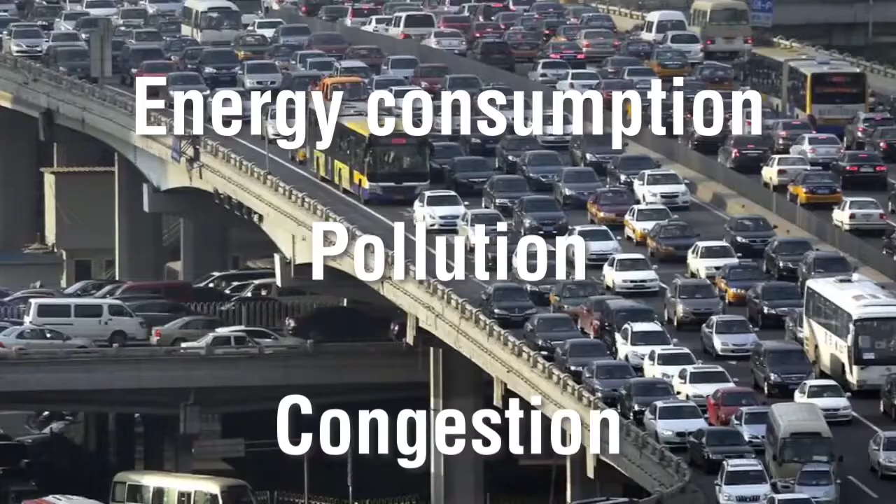Today, half of humanity, around 3.5 billion people, live in cities. Although urbanization generates important benefits for people, such as the creation of employment opportunities, cultural spaces, quality educational facilities, and health infrastructure, as well as an overall improved standard of living, urbanization is also rapidly leading energy consumption, pollution, and congestion to alarming levels.

Much of the urban population of the world currently depend on a car or other motorized vehicles for their mobility, which accounts for an appalling 1 billion cars worldwide. This not only makes cities important sources of air pollution, but are also the places where annually more than 500,000 road traffic fatalities take place.

The problem is that all of these numbers are only increasing. It is forecasted that by 2050, more than 6 billion people, about 70% of the global population, will live in urban areas. Therefore, an international push towards sustainability is crucial not only to lessen the strain on social, economic, and environmental well-being, but also to fast-track national and global development.

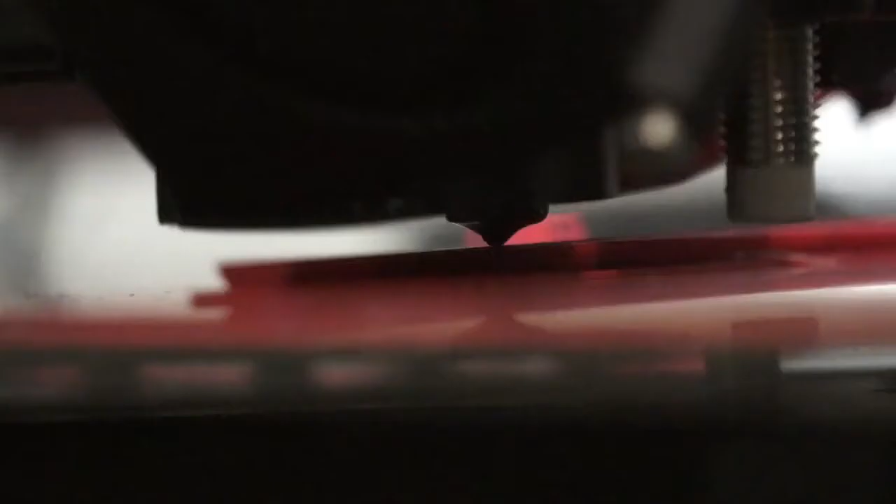In the 2012 United Nations World Conference, global leaders unanimously recognized that transport and mobility are central to achieving the sustainability targets of the world. However, notwithstanding that this generation has witnessed the haste in which technological changes have occurred, in terms of mobility, we are still chained to the past through the paradigms that the car industry has established for the past 100 years.

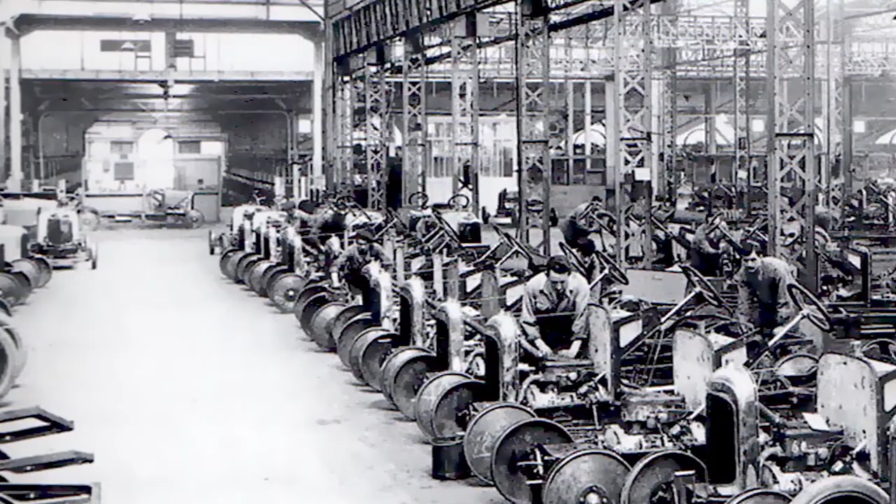For decades, we have been focused on the incredible benefits of using solar energy to sustain humanity's future. So using solar energy has been the core principle of our academic programs, which have been welcomed with strong interest and commitments by our students.

In 2012, the first Spartan Superway work team came to life with the collaboration of many enthusiastic students and professors. And now universities around the world are starting to embrace the solar alternative we are developing to replace our current fossil fuel dependent transportation paradigm.

In this video, we will explain the overall process we have followed to find new answers for mobility challenges around the world.

The first step that our teams have followed to face the immense task of developing a new transportation paradigm was to perform a thorough intellection phase to unravel the intricate mesh of factors that conform an urban transportation system. Any innovation project of this magnitude requires a deep understanding and intellection phase that must provide key information and insights to guide the decision-making through the project.

From the very beginning, we knew that a project as complex as this one would require different teams addressing different problems at the same time. That is why we have recruited students and experts from different professions and from all over the world. It's important to understand that if any university wants to take on a project of this complexity and scope, it's vitally important to develop collaborations with many disciplines, either within or outside the university.

This is the reason why we have divided our team into 4 main subdivisions that within them have divisions of their own, which are engineering, urban planning, architecture, and industrial design.

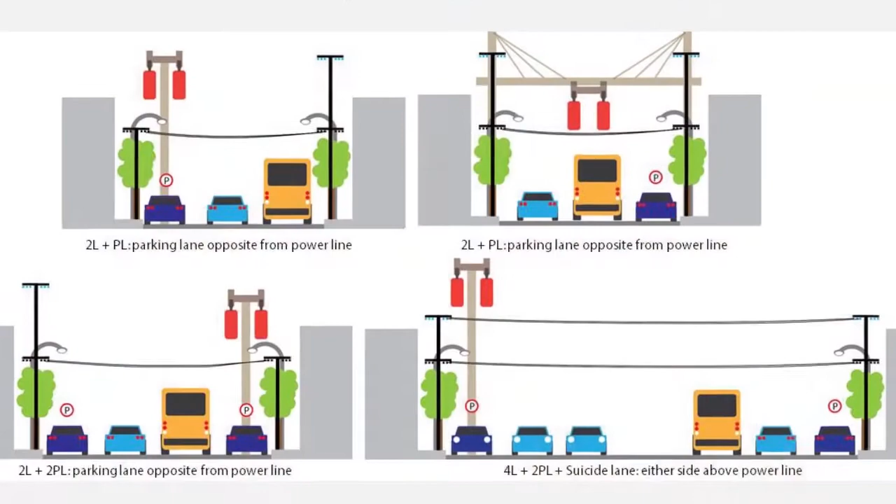We soon realized that for our proposal to be useful for people, it was of the utmost importance that our design became flexible enough so that it could be adapted to any context, urbanized or not.

Therefore, our teams have used information coming from contrasting contexts, from cities with overwhelming traffic problems to places where there is no mobility infrastructure at all. With a clear understanding of these general goals, each team set goals and procedures of their own.

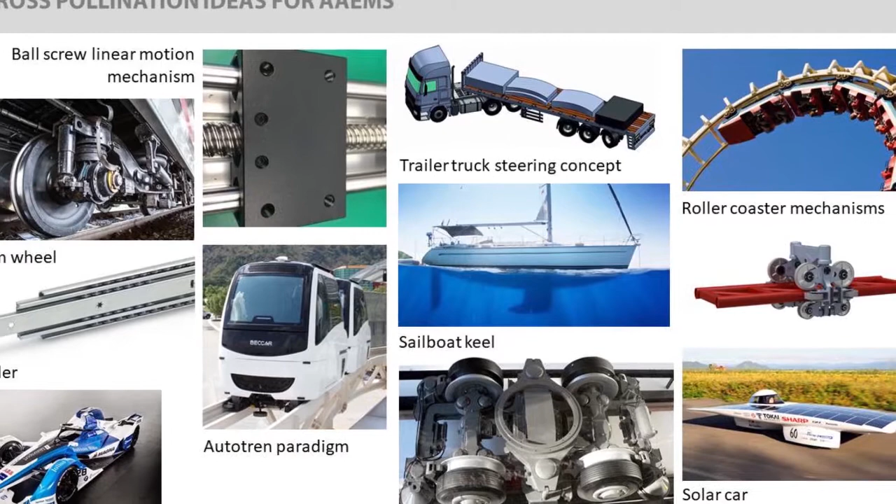But more importantly, because of the knowledge and techniques to solve problems from one field constantly overlap with those of another, the need of dynamic communication and cooperation between the teams had to be encouraged and enabled. The main directives that remained relevant to each and every team were efficiency, cost effectiveness, user safety, and user acceptance.

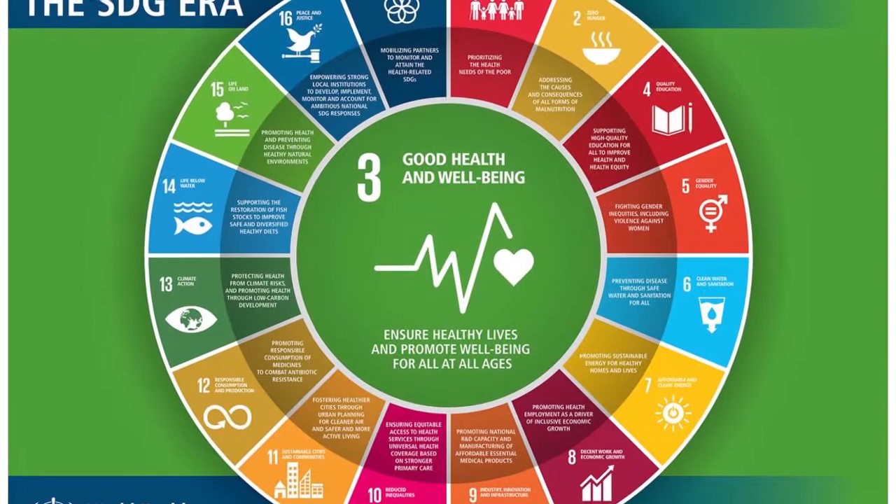Our teams have also studied the sustainability goals of international organizations such as the ones put forward by the United Nations and the World Health Organization. Only a precise balance among all of these factors will provide any project with a solid opportunity of becoming a functioning product in the outside world.

Based upon the analysis of all the data we had obtained, we set out the goal to design a new transportation system, and we called it Spartan, Solar-Powered Automated Rapid Transit Ascendant Network.

Spartan Superway is a transportation system that can be built economically and rapidly, and it's adaptable to both urban and suburban densities. It can be readily expanded, which helps reduce gridlock traffic by moving people and goods on an elevated guideway with photovoltaic solar energy and self-driving zero-emission vehicles.

Since our base of operations has always been located at San Jose State University, which, like any other university in the world, has its own particular mobility problems, we began to study such problems to elaborate an initial hypothesis: if we could connect San Jose State University's different campuses located blocks away from each other without altering the current urban infrastructure, we could begin to demonstrate the flexibility and adaptability attributes of our system.

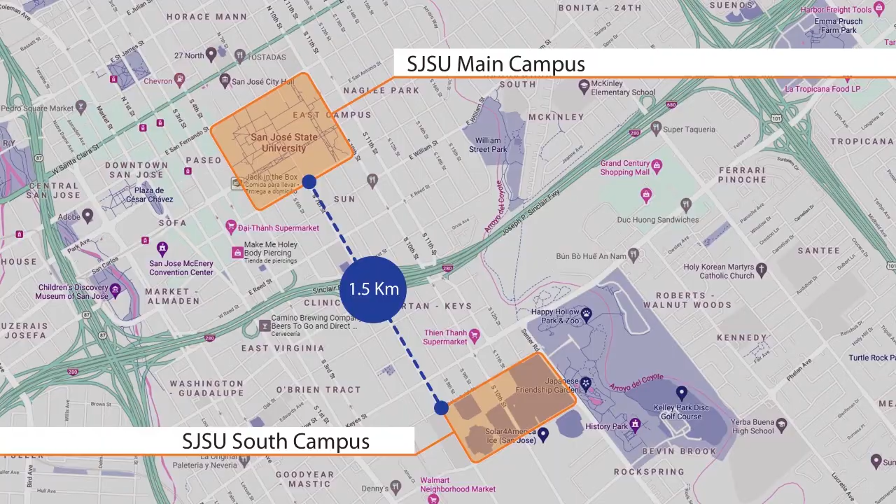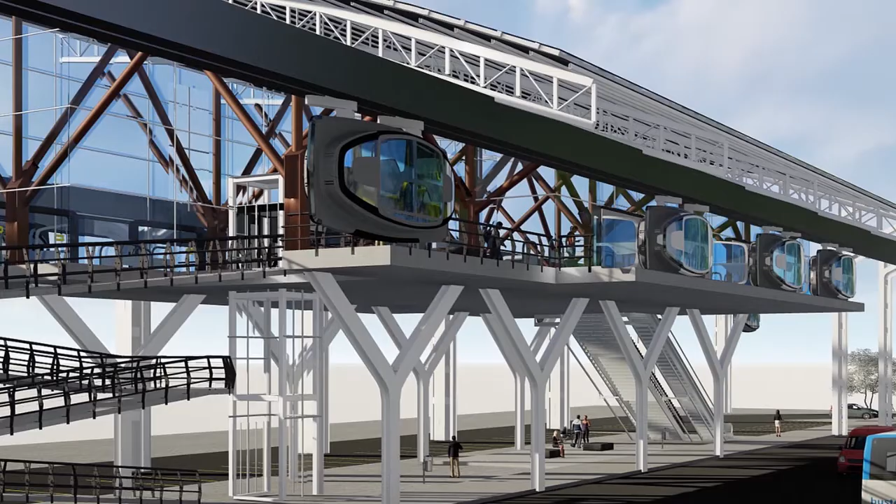It also became clear that San Jose was the ideal testing ground to install our system, as it is located in the very heart of the innovation capital of the world, Silicon Valley. If we succeed, San Jose State University would become the first university in the world to own its own experimental, fully automated photovoltaic transportation system that would not only connect its different campuses, but would also put it at the front of international transportation innovation.

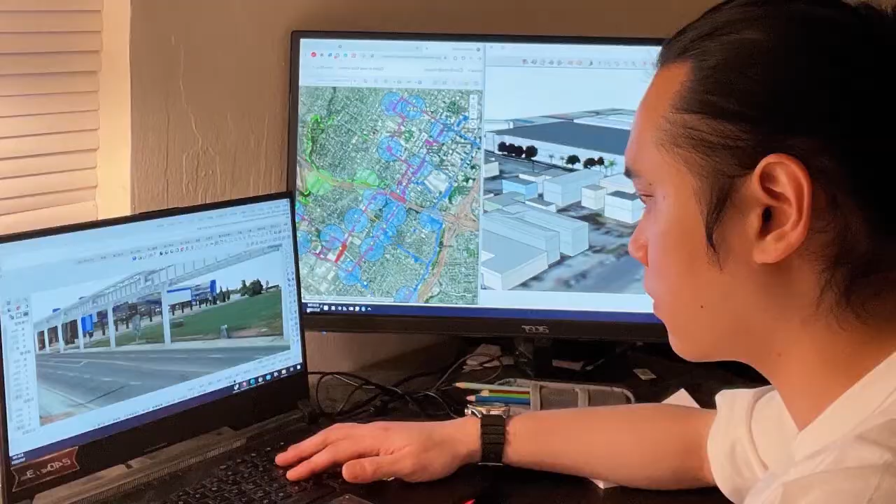Additionally, our team of urban planning did an extensive site reconnaissance to determine the optimal location of the route and its stations so that they could provide a truly useful service to the community. The objective then would be to connect two campuses located several blocks from each other, one being the main campus, and the other the South Campus with its stadium.

One scenario within this context that we found interesting to study further was game days at the stadium, when the amount of people moving from one campus to the other increases considerably, causing congestion, accidents, noise pollution, among other things, which our system could substantially reduce.

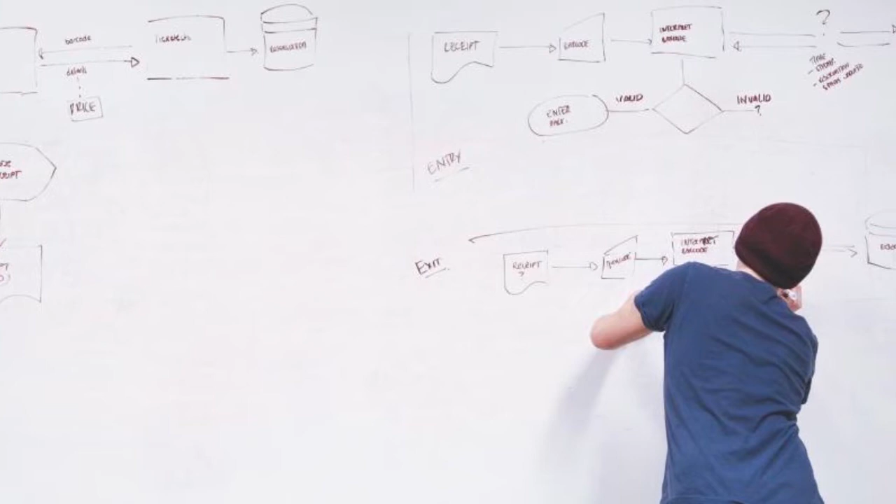While the urban planning and user experience teams were working on defining the context and specific needs that had to be contemplated, the rest of the teams were working on designing the different elements that make up the system.

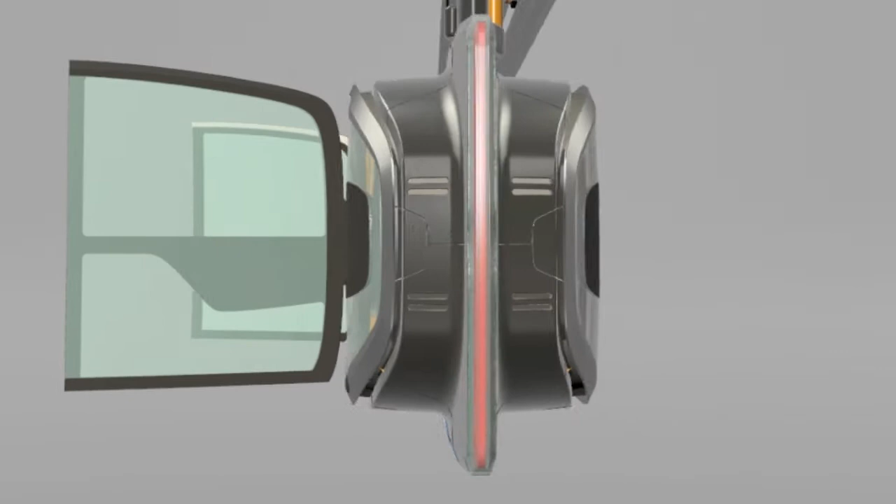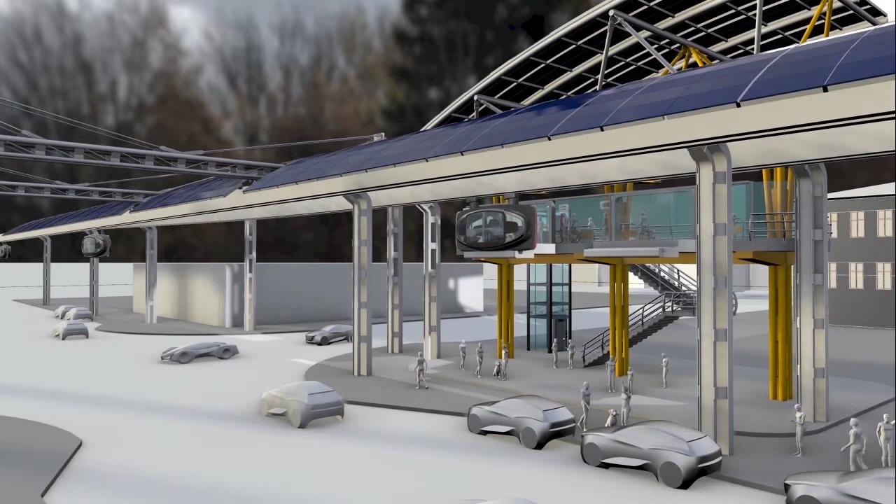The conjoined work between the teams of engineering and industrial design has developed what we call the pod. The pod is a self-driving, fully automated vehicle powered by photovoltaic energy that runs suspended from a bogie that runs on a guideway. This configuration provides a fast, highly efficient, and very safe form of travel.

Our team of engineers has developed a bogie that works under the premise of safety redundancy. If one half of the bogie should malfunction, there is an independent second half that can move the bogie and its passengers to safety. The bogie's design is based on more than 8 years of development by Spartan Superway, with valuable technical contributions from engineering students at San Jose State University, Swenson Solar, the International Institute of Sustainable Transportation, industry mentors, and support from our sponsors.

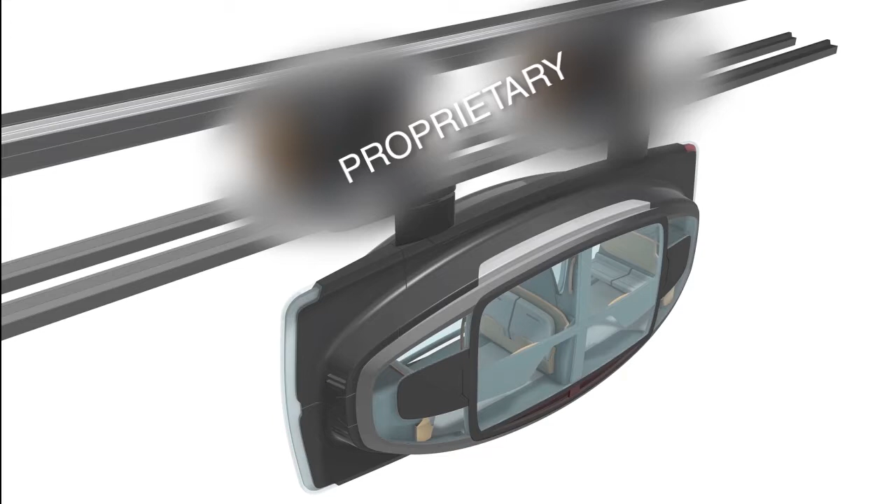One key feature of our design is the specially designed mechanism called the switching arm, a device that allows the pod to change its trajectory. This switching arm is built on the bogie instead of being part of the guideway, as it is normally the case in railway systems. The switching arm mechanism is the key feature that allows the guideways to be simpler in their configuration and construction compared to traditional railways.

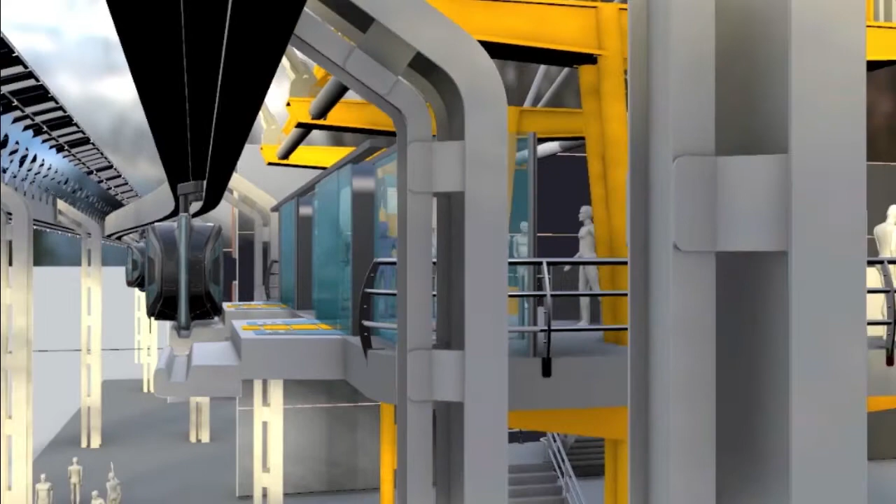This allows the system to become more than a simple closed loop with just a couple of stations. Instead, it will have the possibility of growing into a network very similar to the current grid of streets in cities, with as many stations as necessary.

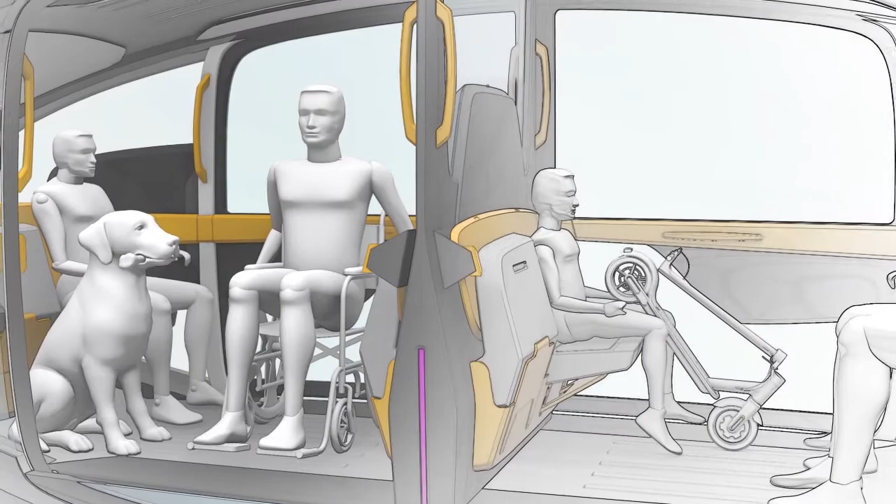We are designing the interior of this pod to be adaptable to different travel circumstances. In terms of passenger transportation, the interior has been thought out to be completely rearrangeable depending on the different user needs we might encounter. Within the pod, users will find a number of possible seating configurations that will allow people with different needs to travel safely and comfortably.

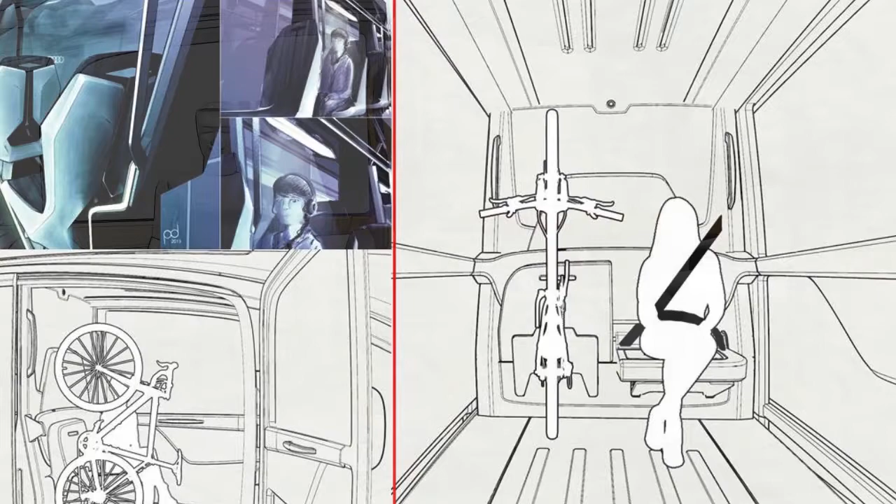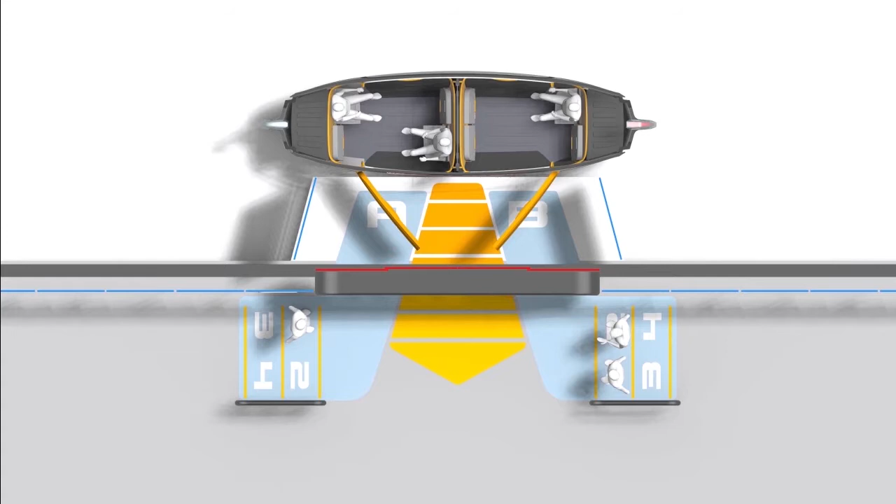It is important to remark on the safety measures devised to maximize safety throughout the ride. For example, the opening of the doors creates a temporary corridor that protects users from gusts of wind and safely conducts them in or out of the vehicle.

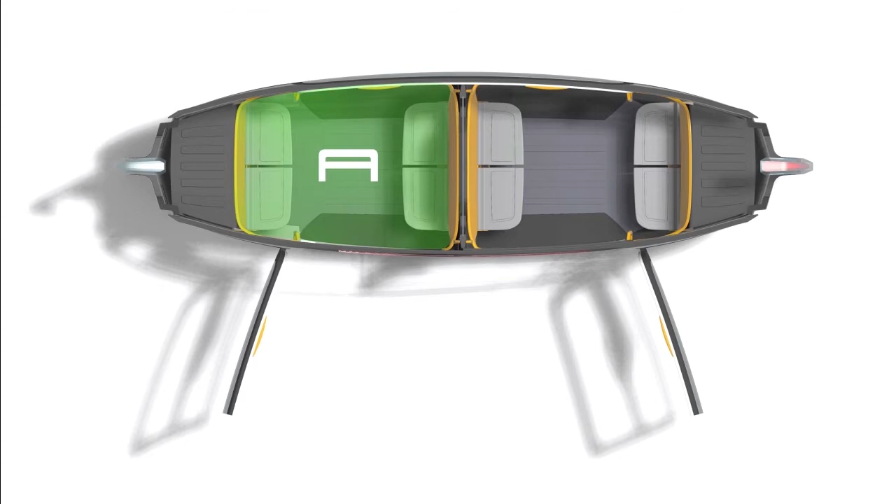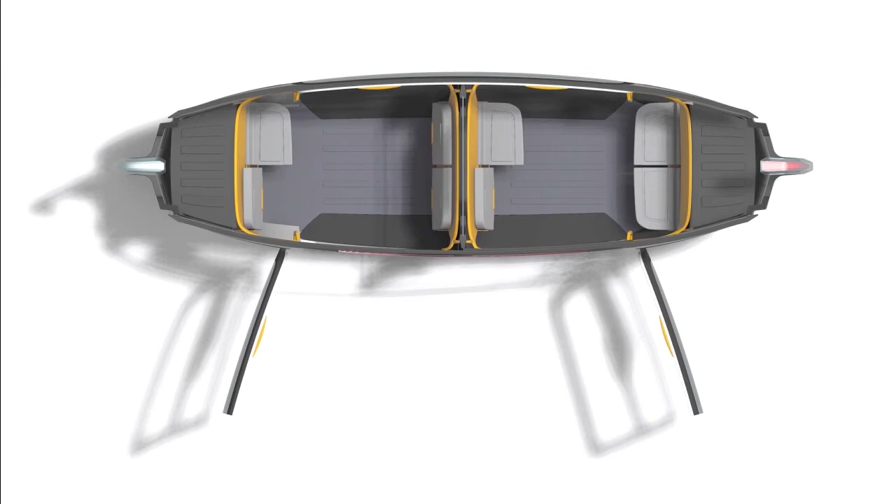One of the lessons that must be learned from the 2020 pandemic is that public transportation must be able to react to such events and provide alternatives where contagion is diminished. That is why the cabin design contemplates dividing the pod into smaller compartments to keep people isolated as much as possible, something that today is almost impossible to do in most public transports.

The Guideway. The Guideway's design is the result of all of our teams working collectively.

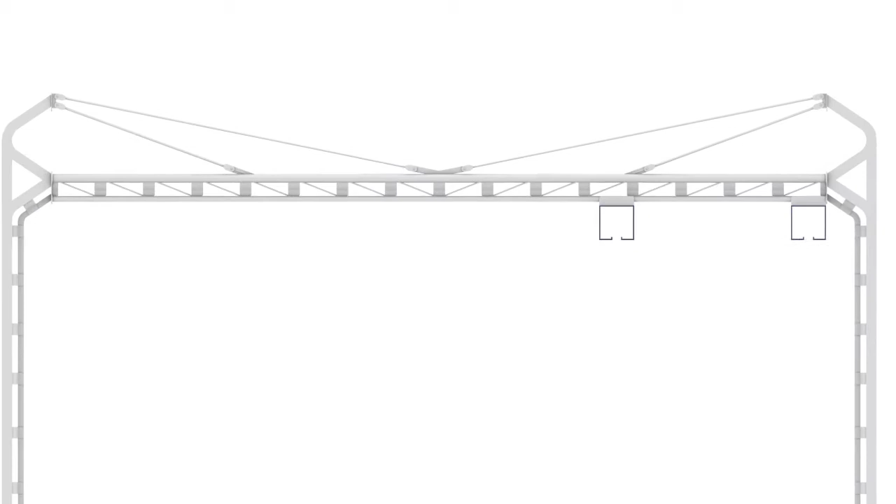The engineering and architecture departments have faced the challenge to make the Guideway and the columns that support it as modular as possible, so that prefabricated parts can be brought from factories to be assembled on site. The flexibility and versatility of our column and Guideway design should allow us to place the system wherever it is necessary without affecting any of the currently installed urban infrastructure.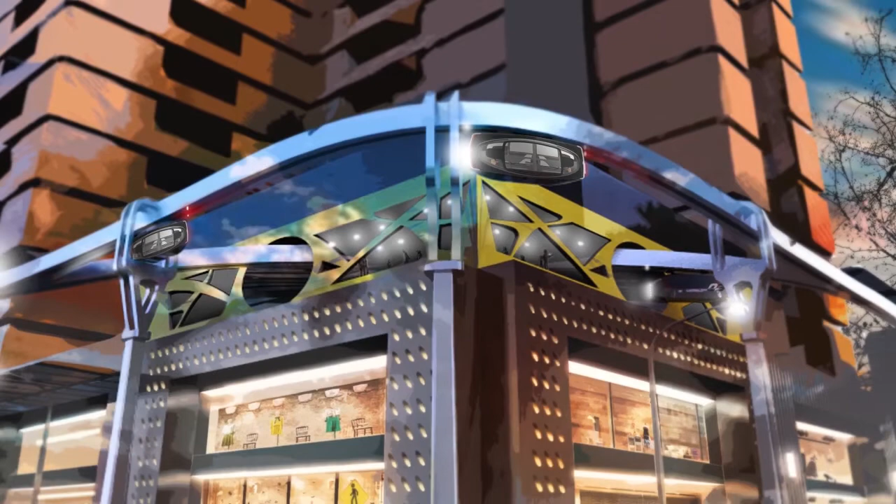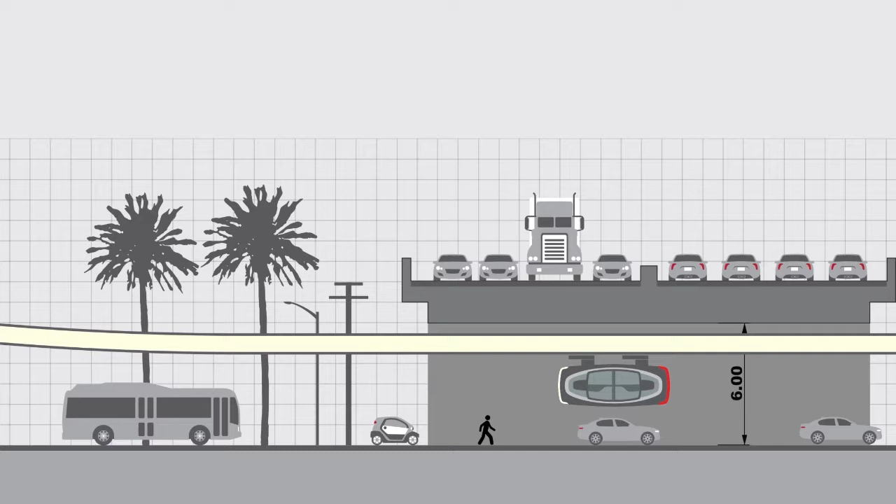One of the main obstacles we had to overcome was finding a way of crossing San Jose's freeway overpasses. After studying different scenarios, the decision was made to go underneath the freeway through the underpasses, as our models and simulations showed that it was possible to do so, thus connecting parts of the city that frequently remain inaccessible to people without a car.

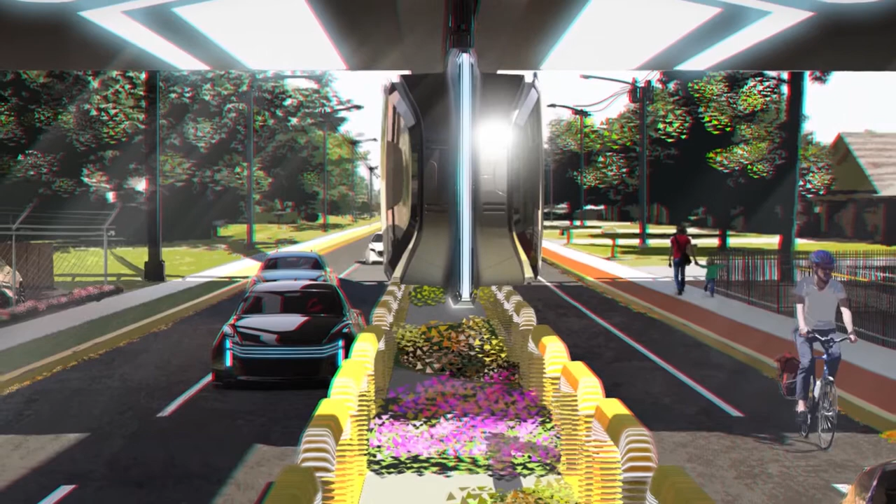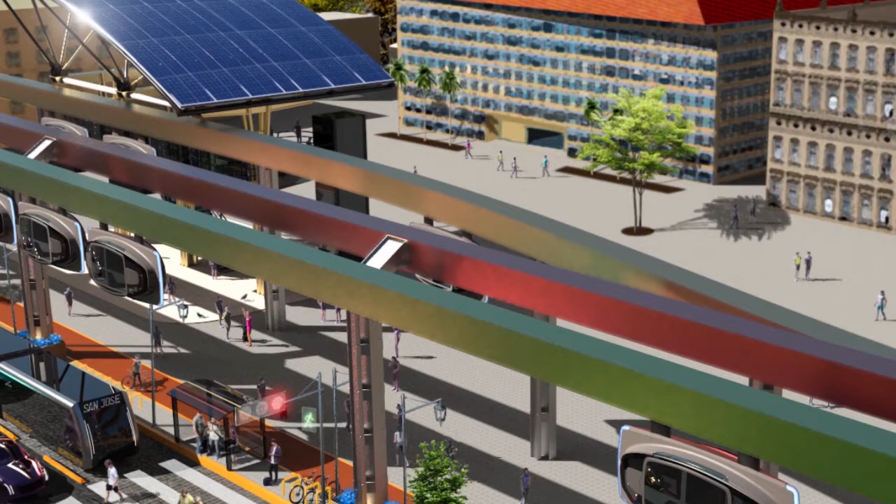The combined function of the switching mechanism on the bogie and the careful placement of forks on the guideways will allow the pods that need to stop at a station to divert from the main guideway without interfering with the rest of the transit.

All of these designs and functional features would make little sense, especially today looking into the future, if they were not powered by a renewable energy source. Therefore, the whole system will be covered with solar panels that will provide power not only to the pod cars, but also to the stations, and will provide electricity to all of the system's requirements.

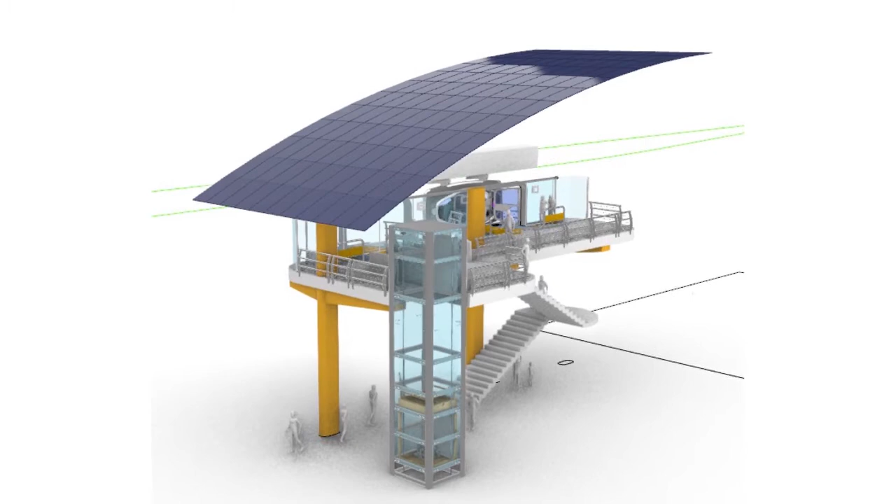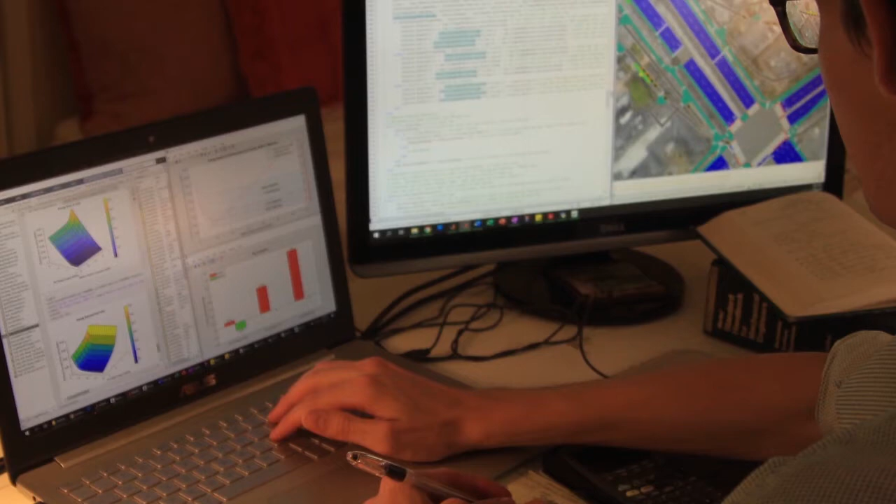The use of photovoltaic energy to power the system has been a crucial aspect of our concept since its very inception. Our team of engineers has conducted a series of simulations under different circumstances to find the energy requirements of the system. They are also trying different configurations to find the optimal arrangement of electrical components to use solar energy's full potential.

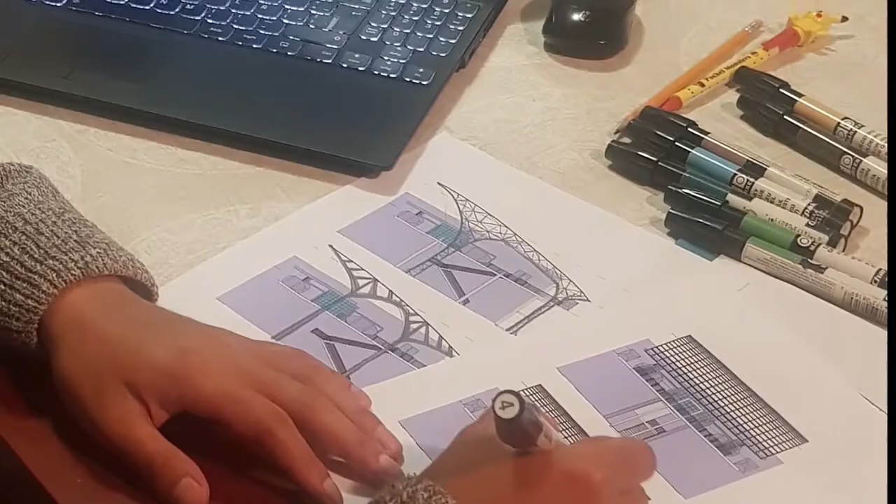Finally, the work of our architecture, urban planning, and industrial design teams came together to design our stations: elevated access platforms that allow riders to board the pods in the most safe and efficient way.

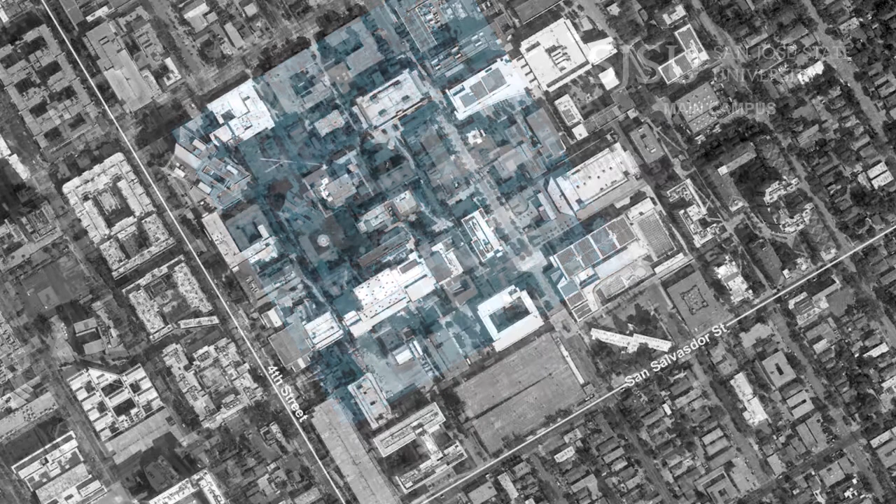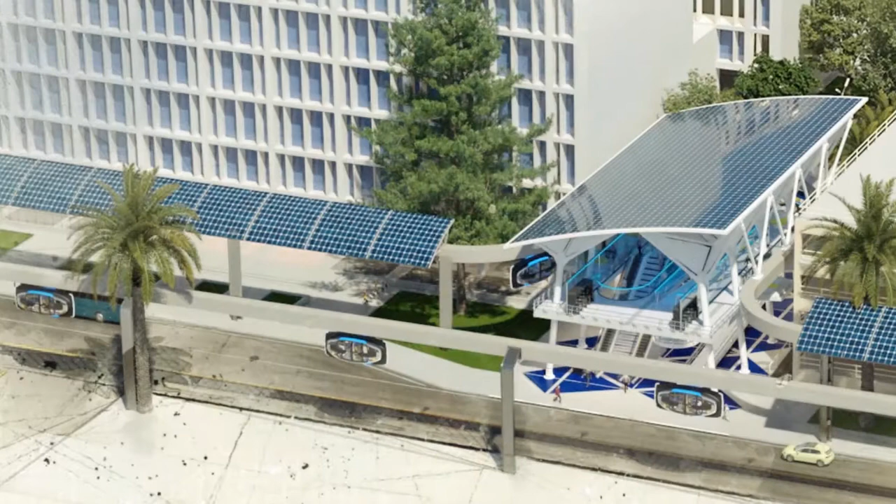The North Station. Our northmost station has been thought out to be located within the main campus of San Jose State University. While scouting the area for open spaces to locate this station, we came across a small plaza or corridor between two buildings that, because of its location and dimensions, became the perfect spot for our purposes.

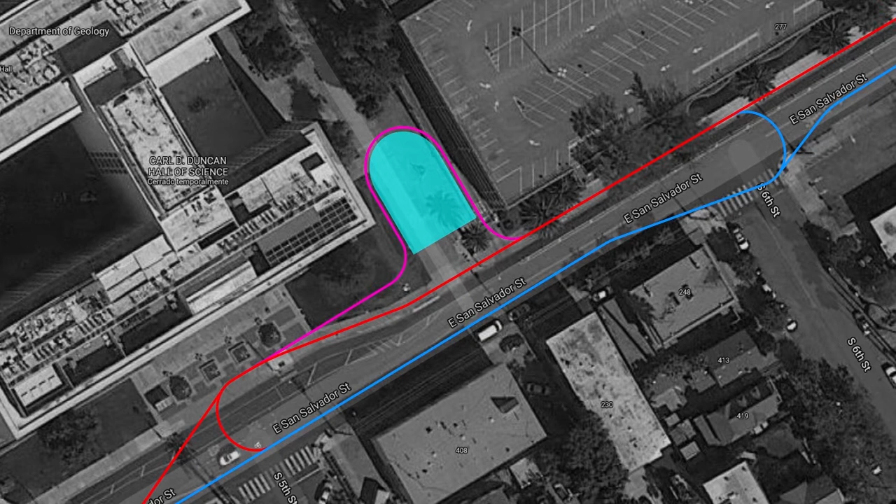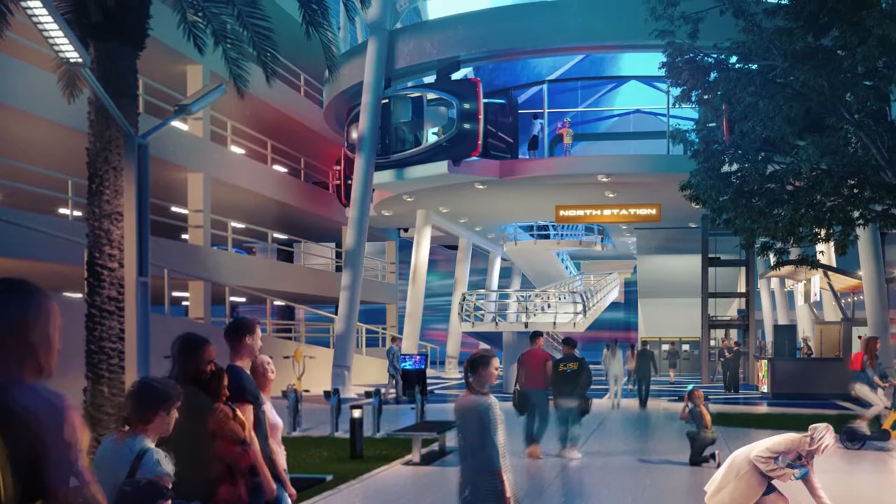This design is a good example of a station that can only exist on one side of the road, on a two-way street. Its location calls for the use of roundabouts to allow the pods to change direction and enter the station. This open space corridor not only serves as a perfect guideway for people to go into the station, but also could become an unofficial entering portal or meeting point for people to later go into the main campus.

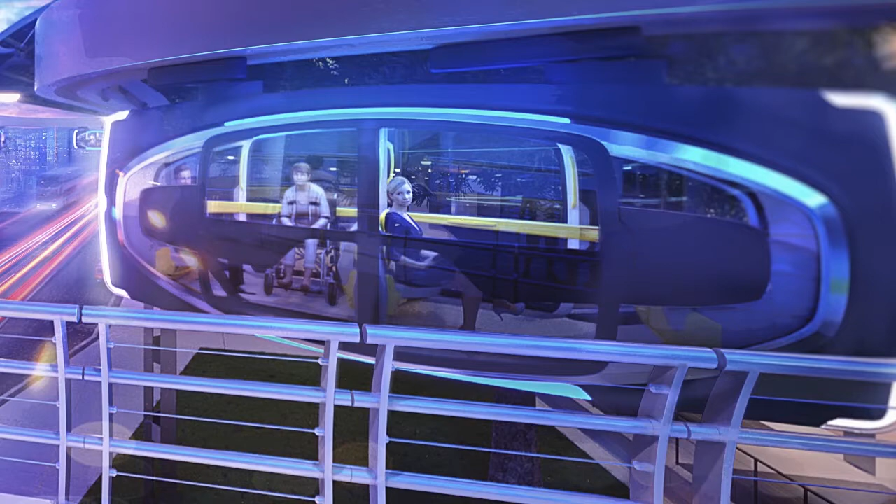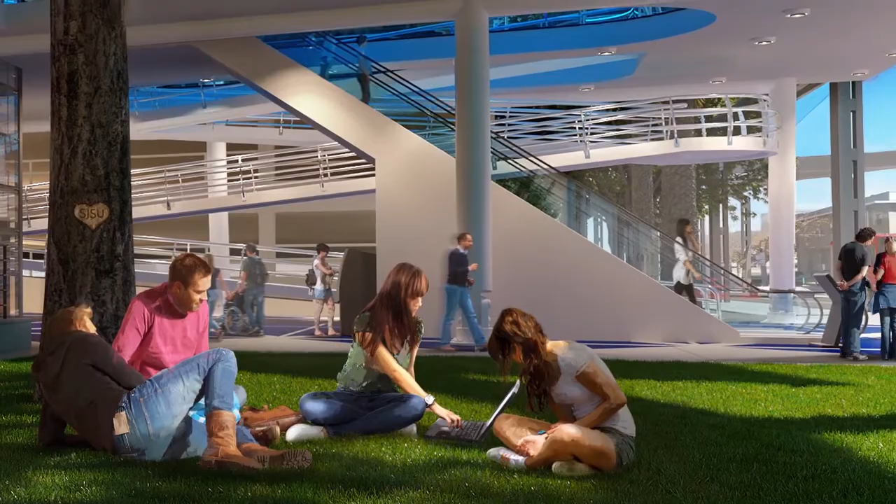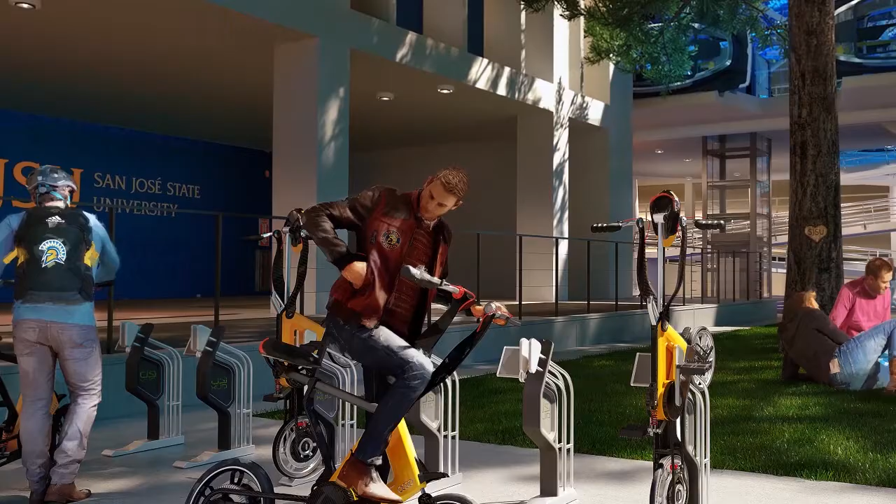Our stations are being designed carefully to become more than mere boarding platforms, as they are being given features and spaces that foster socialization. One purpose of this station's design is to become a place of reunion and social interaction. That is why we are planning all of our stations with different types of services, such as last-mile vehicle stations, to help people move around, whether they are using the system or not.

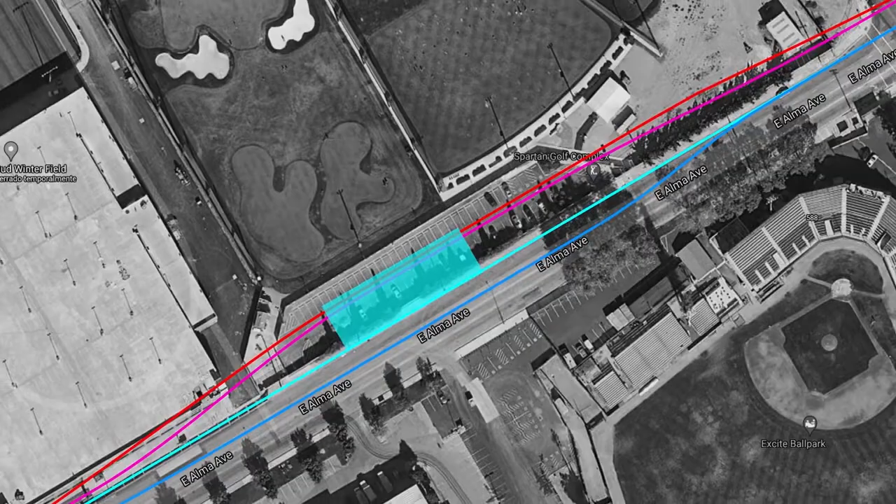The South Station. Our southmost station is located at the sports campus next to the Spartan Stadium. Next to the main parking area of the Spartan Stadium, we found a lot big enough to locate this type of station that demands a lot of space. It is the largest of our stations, as it must be able to support a flow of a large number of users during sporting events.

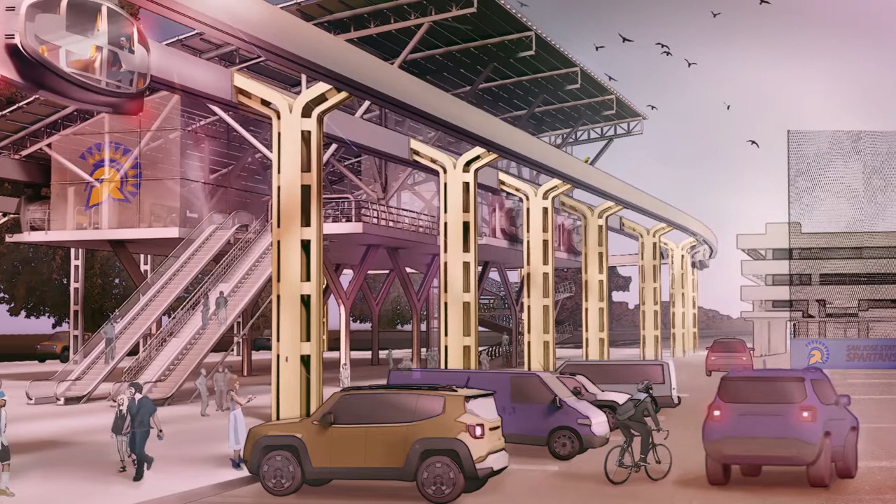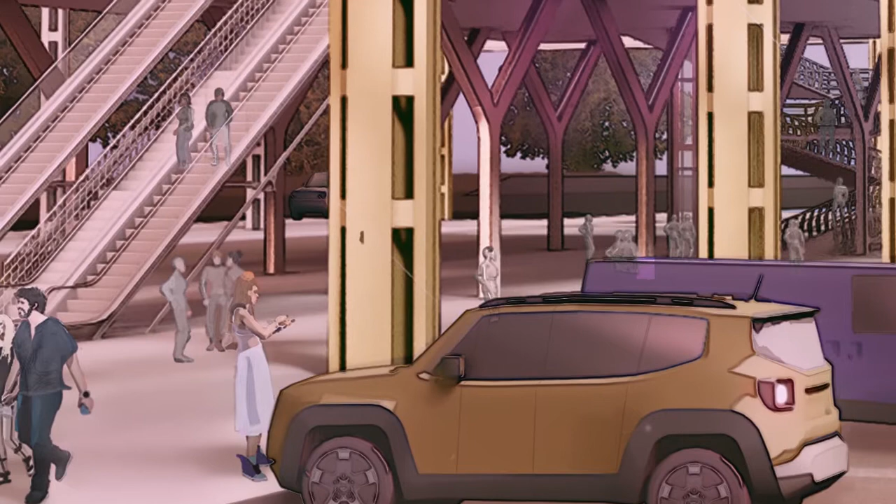Considering the amount of people that would come through this station, this design includes escalators as an additional way to leave the station. Taking advantage of the stadium's parking lot, this station could provide an alternative parking solution to car owners, as they could leave their cars at the stadium and then take the system to get to the main campus, thus helping diminish congestion at the main campus parking buildings.

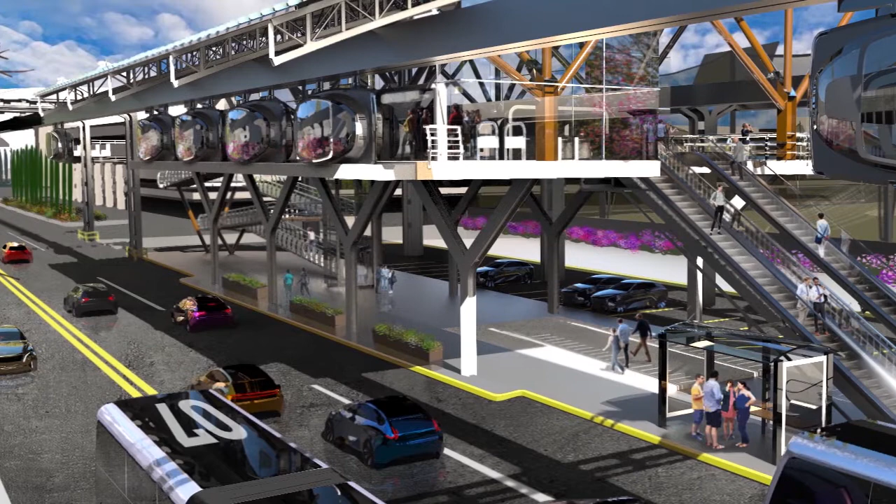The modularity of our architectural design and quick building method will permit stations to grow or decrease in size according to the space available, as can be shown by our next example, the Central Station.

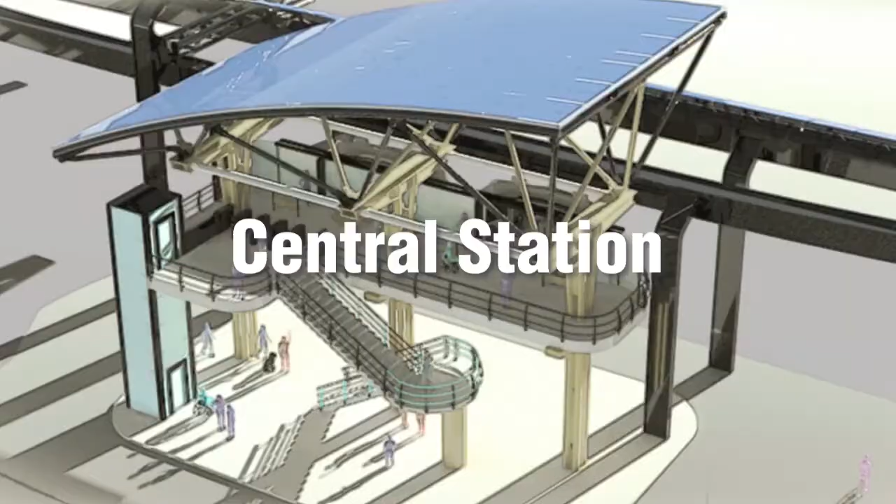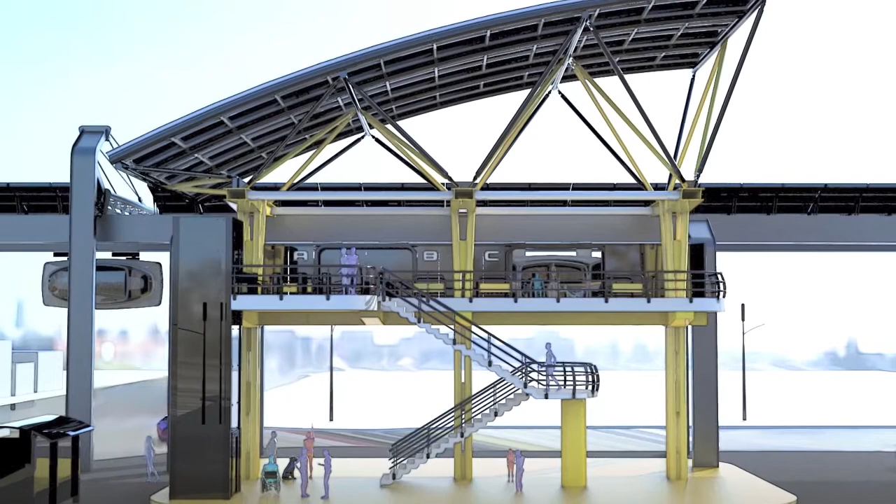This is our most compact station, designed to be the minimal expression of our concept, so that it can fit anywhere where there is some underused urban space.

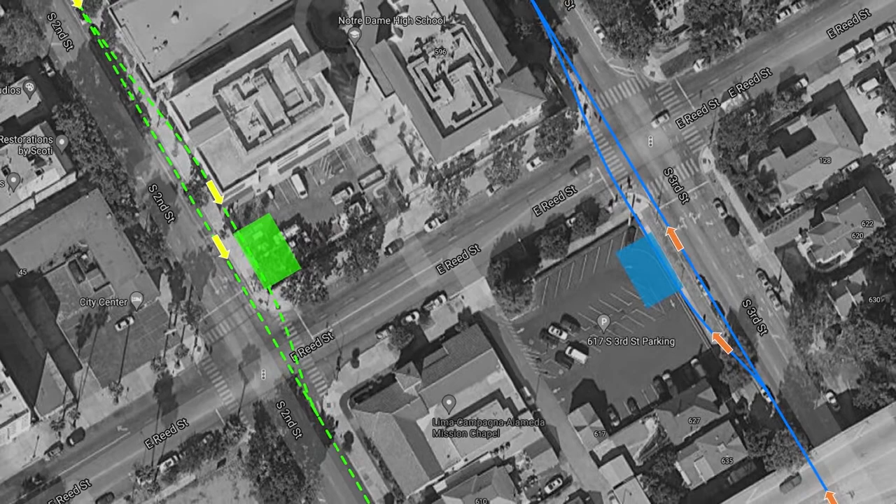The central stations are meant to be located between the north and south stations, near schools and offices, taking advantage of the space provided by their parking lots. The installation of the station would not interfere with the use of such spaces.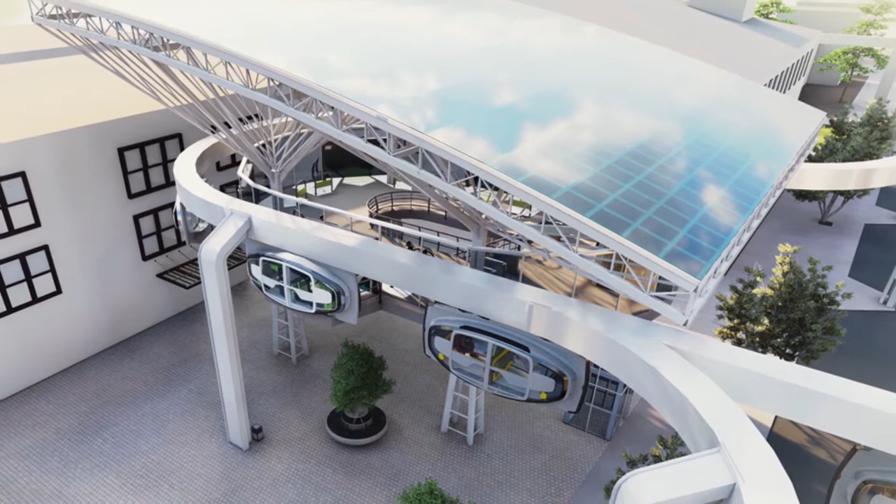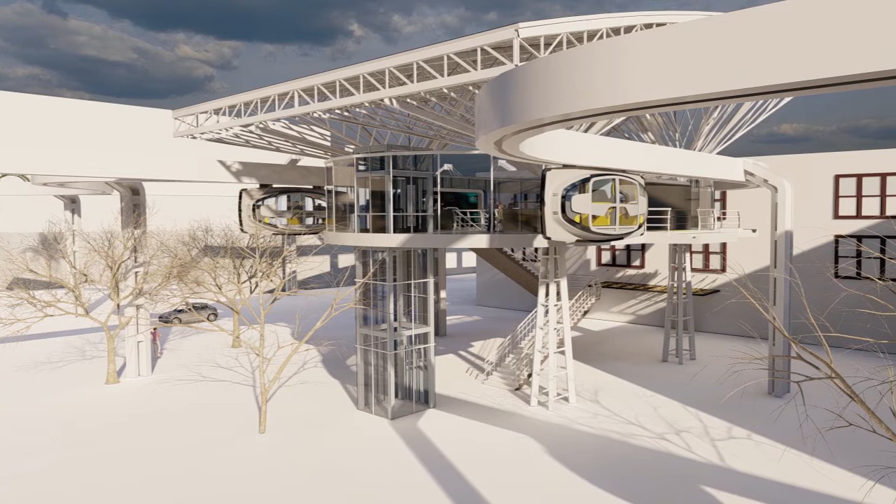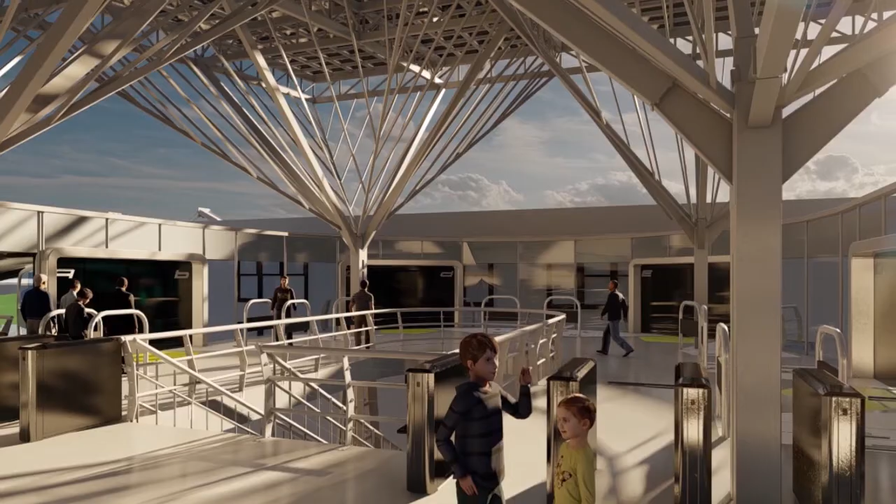This would be the type of station most frequently used, as it is the most economical to build and the most practical and adaptable. After a complicated and time-consuming design stage, we started looking for technologies that would not only make possible all the proposed functionalities, but also transform our stations into special living spaces. Transparent TV screens, light panels, and other technologies should be affordable in the next 5 to 10 years.

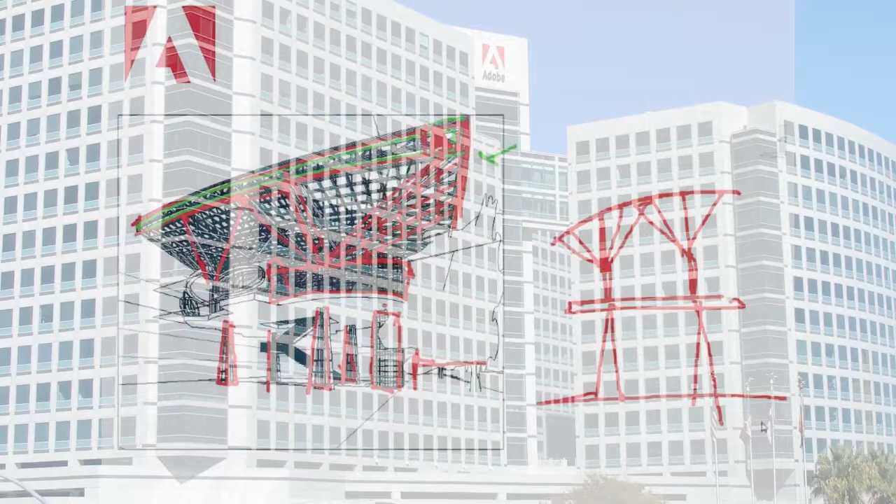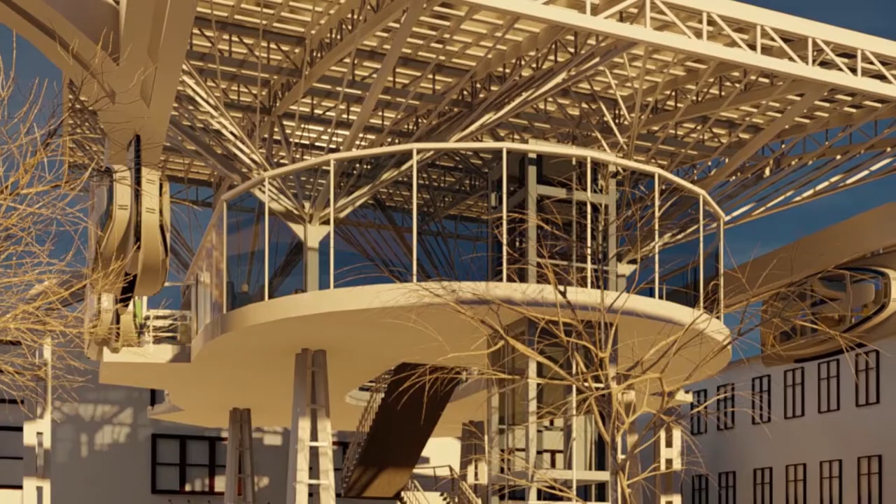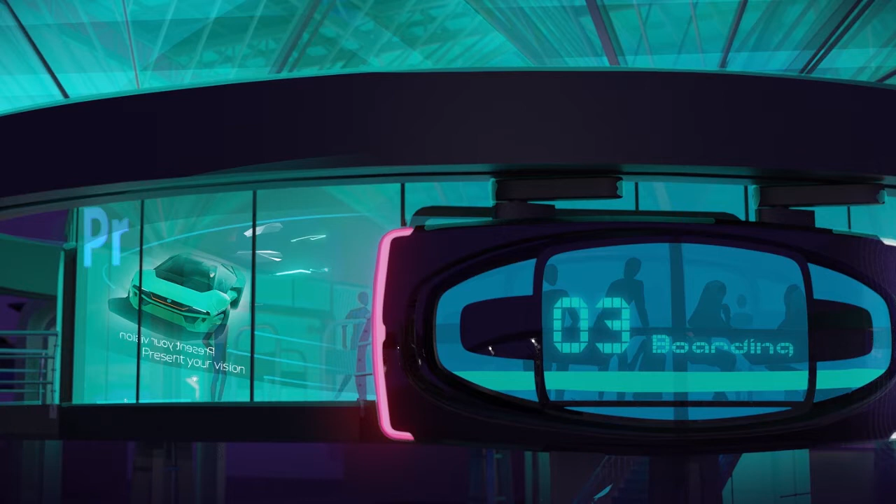One of the most important concepts about our stations, which began as a simple idea and evolved over time, was the possible involvement of large corporations based in Silicon Valley in the construction, management, and maintenance of the stations. These images are examples of how the relationship between the company Adobe and one of our central stations might look. We chose Adobe as our experimental sponsor company for its colorful brands and logos.

The possibilities are truly endless.

A user journey map is usually associated with software design, but in general terms, it is a design tool used to gain insights about all the different interactions the user has with a product, service, or system. It is mainly achieved by systematically tracking and analyzing all the steps of the user throughout the entire experience. To create the user journey map of our system, we developed a persona to provide our design team with a shared understanding of the users in terms of goals and capabilities.

User journey: the journey begins when the person interested in using the system is able to program her trip through an easy-to-use app that, among other features to help usability, will have voice commands for people with special needs.

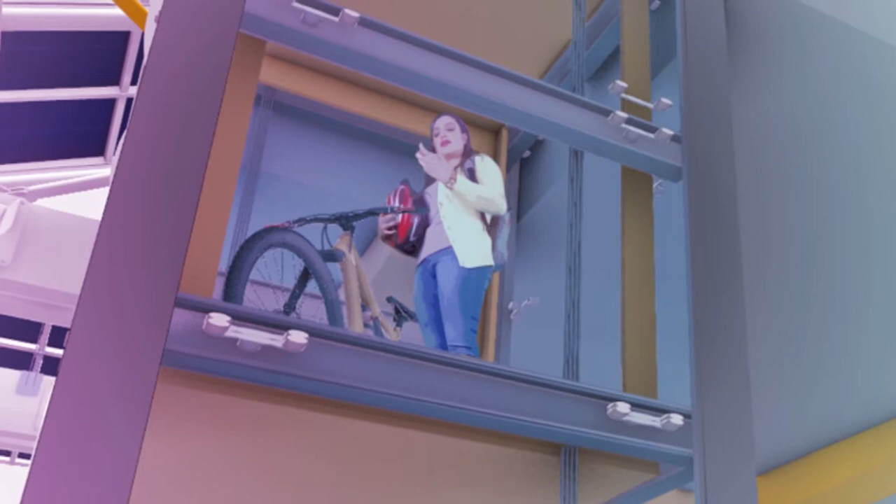Once a trip is pre-selected, the user can walk or take last-mile vehicles to get to the station. The stations will have regular and electric stairs, as well as an elevator to help cyclists and people with special needs get to the overhead platform with their personal vehicles.

Once at the elevated platform, the user will have to look for the special turnstile so she can go through it with her bicycle. The app will then send a message telling her which gate to go to and which space to occupy in the waiting area.

The user will use the signs on the floor and walls to look for her assigned gate. An identification pattern will appear both on the app display and on the surface of the gate doors, for the user to verify she is waiting in the right place.

Once the pod arrives, a message will appear on the gate doors alerting incoming passengers to wait for the egress of outgoing passengers. The user must remain standing on her waiting spot, allowing the egress process to take place without obstructions. The gate doors will close again to permit the sanitization process.

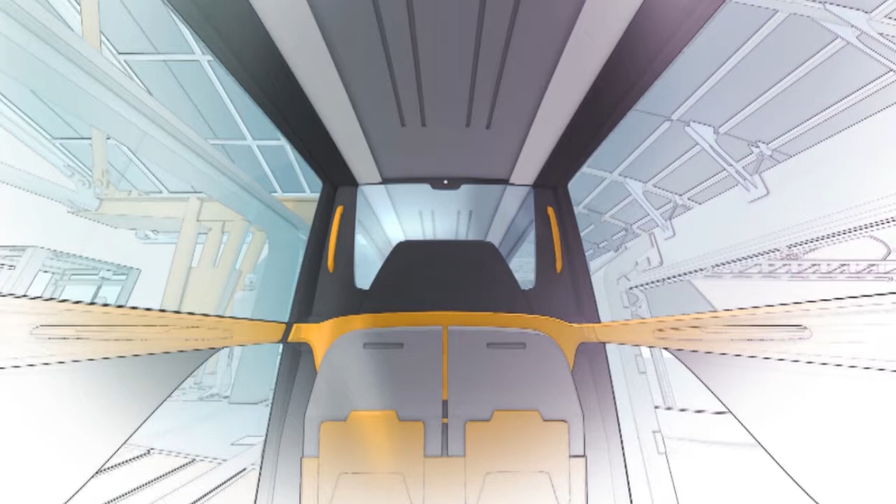This process is optional because the ventilation filters inside the pod take care of keeping the interior clean during the rides. If the user asks for it, a special spray will provide extra sanitization.

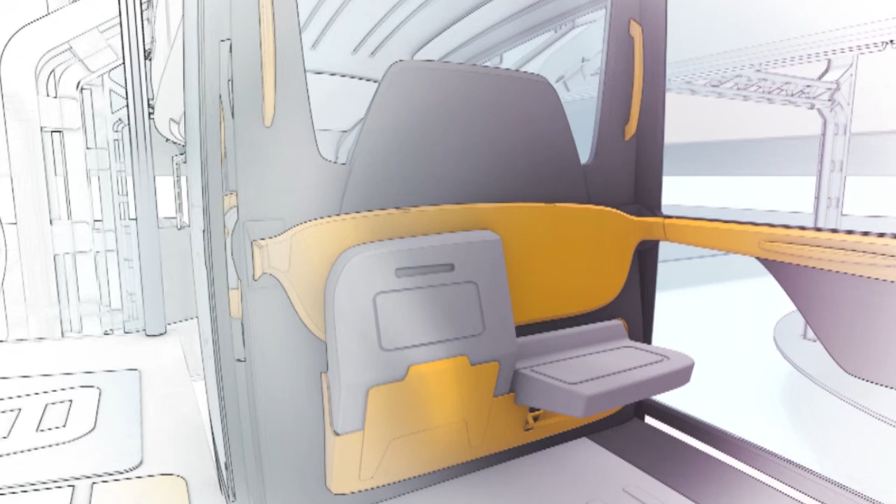Finally, the doors open, allowing the user to board the vehicle. Special signs will indicate her assigned seat, and only the required seats will be deployed. The user will find a special rack to secure her bicycle, as she previously requested this feature on her app.

Once her bike is secured, the user takes her place. Only after she has secured her seatbelt will the pod close its doors and start the ride.

The riding experience will be like none other you have experienced before: personal, safe, fast, smooth, and very enjoyable.

Once the pod has safely attached itself to the station, the doors will open, allowing the passengers to get off, ending the ride. After the user gets off the pod, the whole process begins again.

As we have seen before, some of our stations will be enabled with a ramp, which can be used especially when a bike or other vehicles are involved. The overall idea is to provide a service like none other ever devised before: safe, practical, efficient, and enjoyable.

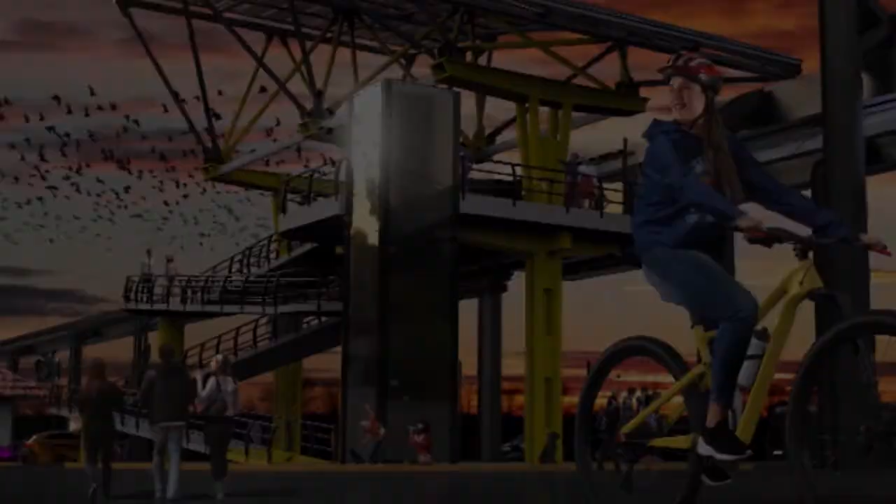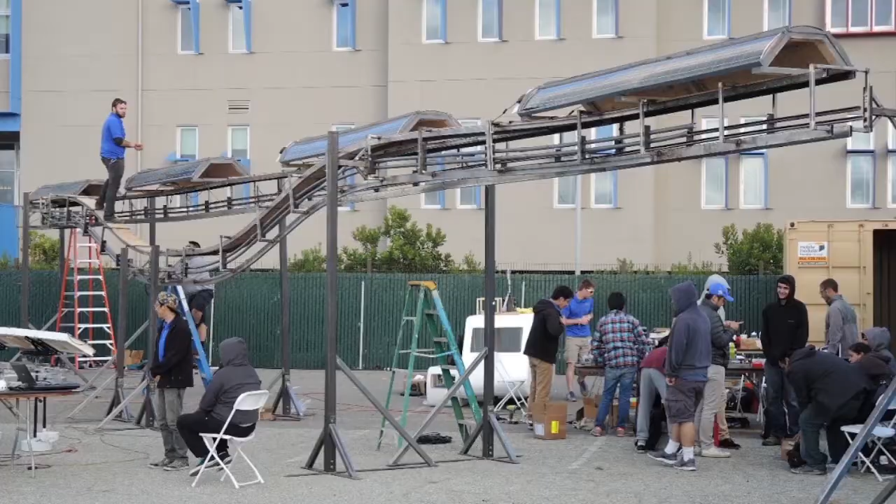We have shown the vision of how urban transportation can be done with solar energy, what it will look like, and how a user would experience it. There is still much to be done in the next few years to fully realize the vision and implement it around the world. If you can contribute, please contact us to join our project.